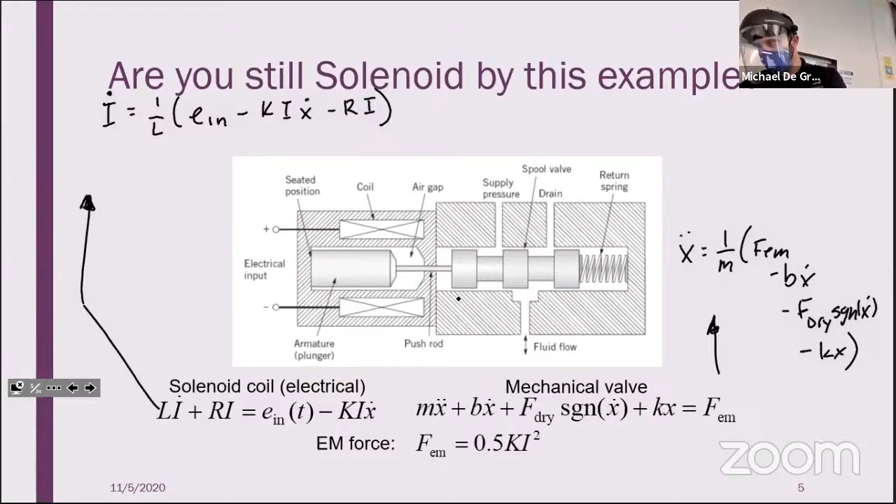SGN, that's the signum function, right? It's going to return -1 when we have a negative number there, +1 when we have a positive, and 0 when we have 0.

Okay. Let's look here. I've got my integrator block for my mechanical system, right? This is the same model that we came up with towards the end of class on Tuesday. Symbolically, then that's just plugging in a number once we get it. So we've got this, right? This is inside of my subsystem block.

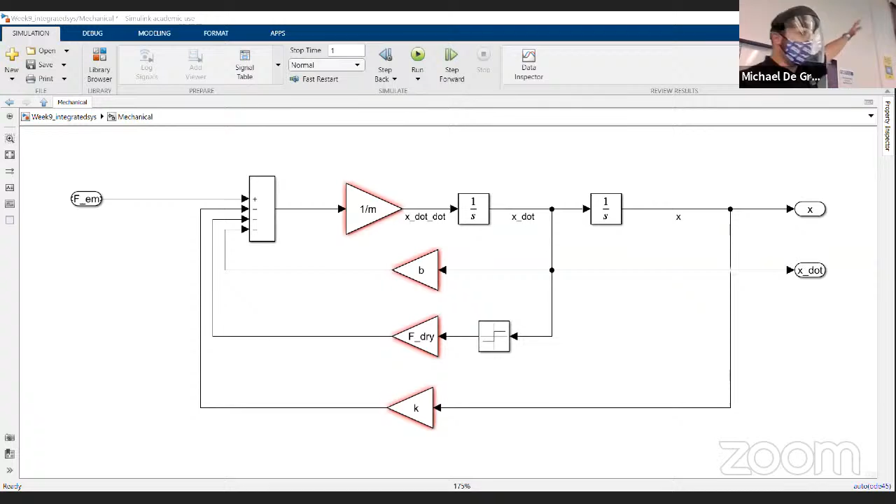So I've got this little bubble that says FEM. That's obviously my electromagnetic force, right? And what am I feeding out of here? Well, I've got the X position in that top little bubble there, and X dot in the bottom one. What are those? Those are my input and my output ports. So let's talk about subsystem.

Right. So you can type subsystem. You pick the top block here, and look, it gives me this. Notice it looks exactly like the other ones that I have there saying mechanical and electrical. And inside, they're kind of transparent a little bit. You can kind of see in there, and you can see it comes with one input and one output. Notice that the block itself also has one input and one output.

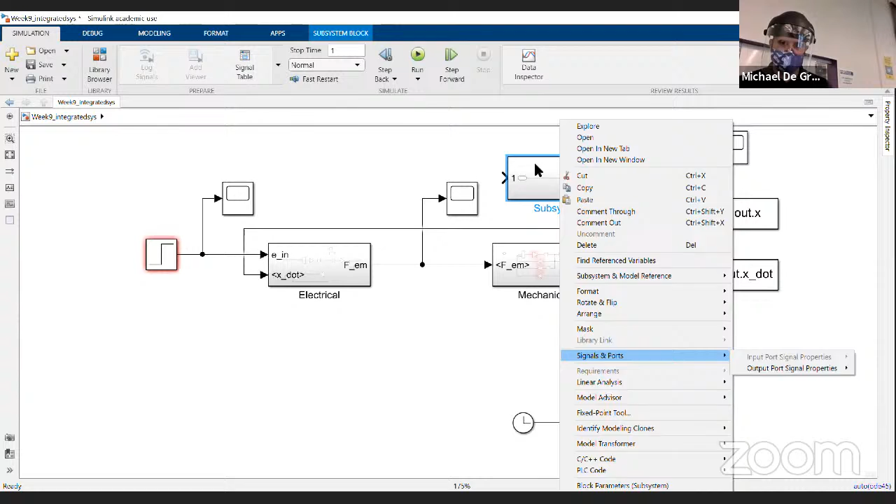So what if you wanted more? Well, there's a couple ways you can do it. You can go to signals and ports, add output signals. Or if you double click inside to open it up, you've got one and one. So you can disconnect this, and you can move them around. But if I wanted an extra one, I could copy it, Control C, Control V, and I can have as many as I like.

But when I come back out, which you can use this toolbar and click, notice now I've got 4 inputs. It automatically tracks them. And if you label your signals, it will automatically pull in a label for what the signal is. So let's go back in here. We'll get rid of everything that's in there. And if I do that, look, the block is blank.

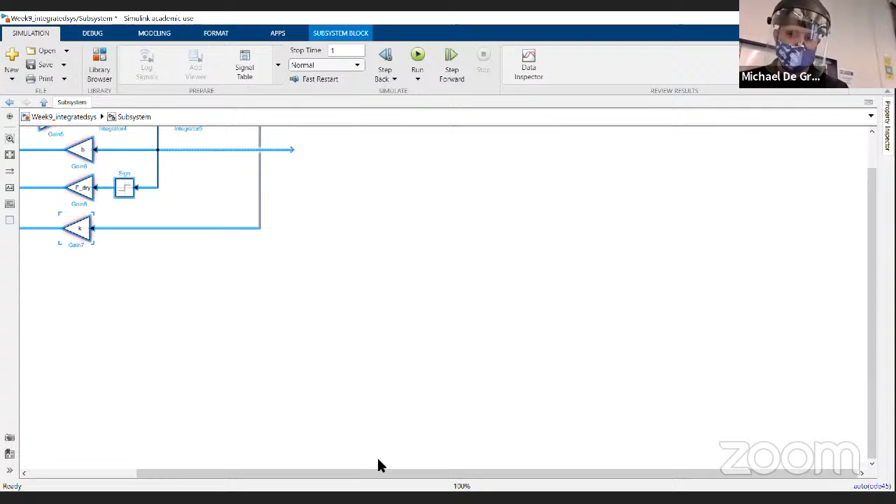And if you were to take all of your stuff from the initial diagram here, double click to get inside, then notice, this is the block diagram that we had from class on Tuesday, and I just copied it, pasted it, put it into the subsystem block. Now it's a subsystem, right? But now I don't have inputs and outputs. Oh man.

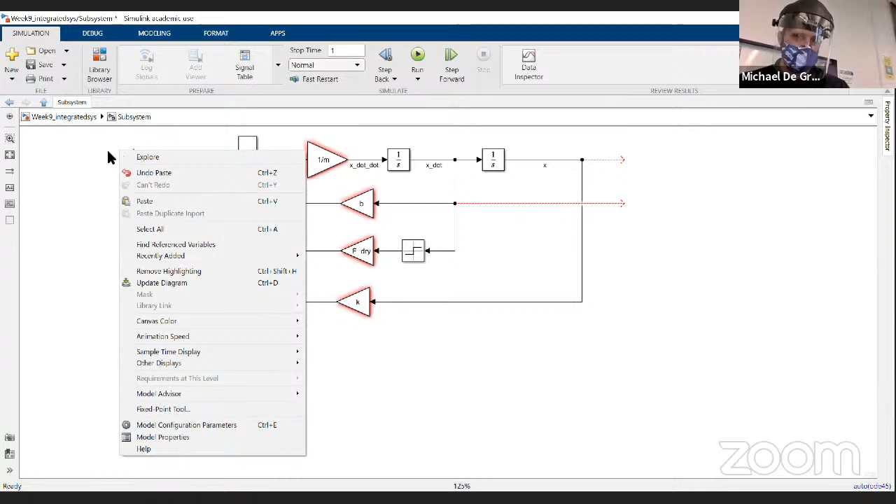So let's go up here. We'll go to our library. You can't see the library. I click the library button. You go to ports and subsystems, and then you can have an in or an out. So if I drag my in over here, I can drop it right there. Look, there's an in. Number of ports, port number. You can assign that. We're just gonna leave it as 1.

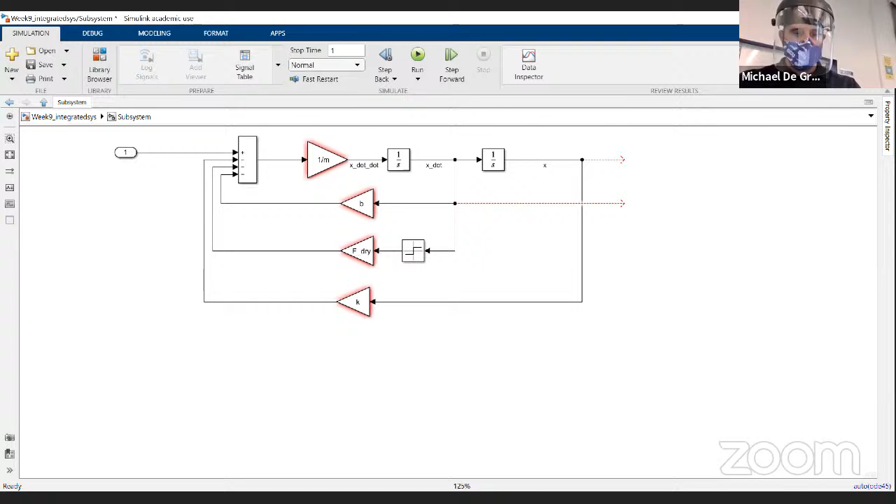What if I typed out? So instead of going back in the library, I'll just type out. Yep, we'll take out 1, put it there. I don't feel like typing it again. Copy, paste it, put it here. Come back out, I've got this stuff. How do I know that I want that to output position and velocity? Here's how I know this.

We look at the equations. X dot needs to come back and feed into the back EMF. X dot is creating the back EMF. Our equations are coupled, so our subsystems are coupled in some way. The electrical system produces FEM, the mechanical system produces what is used to produce the back EMF, that X dot, and we go round and round in a loop. And you can see it here: X dot is coming up, and back around is an input to my electrical system.

Okay. All right. What about this electrical system? So let's talk about the ground effects that I'm getting here, right? Why am I getting red fluorescence around these blocks? Well, I haven't defined any parameters yet. Notice, I've left it as a variable, right? It says 1/L on here.

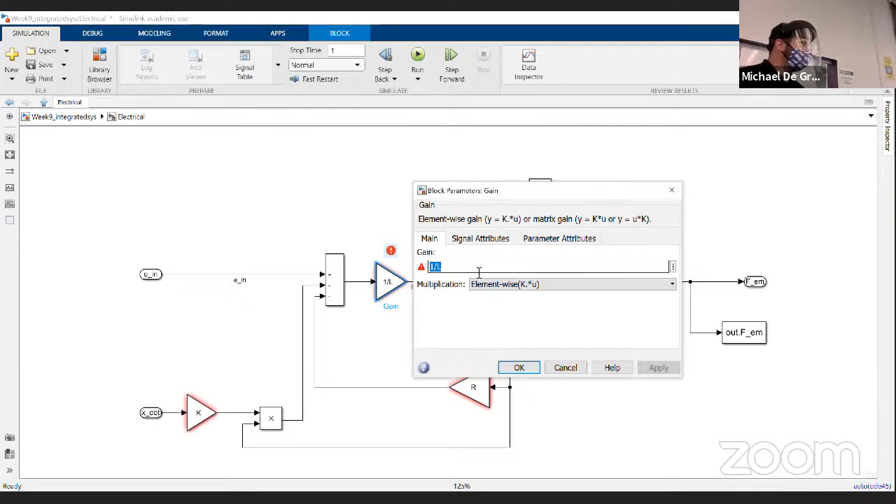I haven't defined what L is, and I think I went over this a little bit, right? But you can use MATLAB to define your workspace variables, and then those variables will get transferred, or will get pulled by Simulink, right? Because Simulink runs MATLAB in the backend, and they share the same workspace. So I'm going to define all of these in MATLAB in a second before we run this.

All right, so we have our equation, right? Our equation was I dot is equal to E in of T minus Ki x dot minus Ri, all times 1 over L, right? So what do I have here? Well, here's I dot, right? I dot, well, that's equal to E in minus I times K x dot. This is a new block that we haven't talked about though, right?

This guy. This is the product block. Why can't we just use a gain block, right? We're multiplying these two things together. Well, we're not multiplying it by a constant, right? You're multiplying two different signals together. And what the product block does is it takes two different vectors and it multiplies them element-wise.

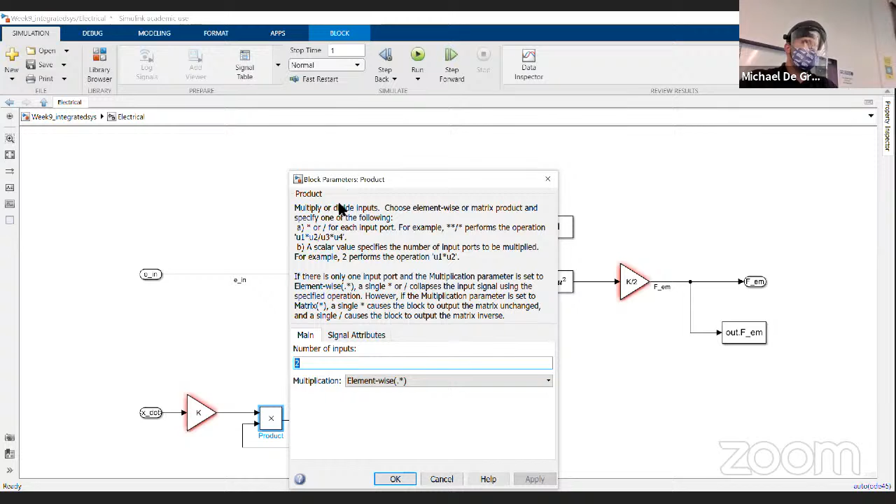And what that means is that it'll take the first entry of each one and multiply them together, the second and multiply them, and so on all the way down the line, right? Until we stop running our simulation. So it's going to essentially run this multiplication at every time step, right? For these two signals. This creates my back EMF, and then this signal is just R times I, and those all get subtracted. The whole thing gets multiplied by 1 over L. That gives us I dot, right?

I take the integral, this becomes I, right? But that doesn't give me FEM, right? Because FEM is K times 0.5 times I squared. Well, here's another new block. Here's the square block. What does it do? It squares my signal. So that's I squared, right? Here's I squared, and look, the square block does more than square, right? It does a lot of different things. You do log, exponential.

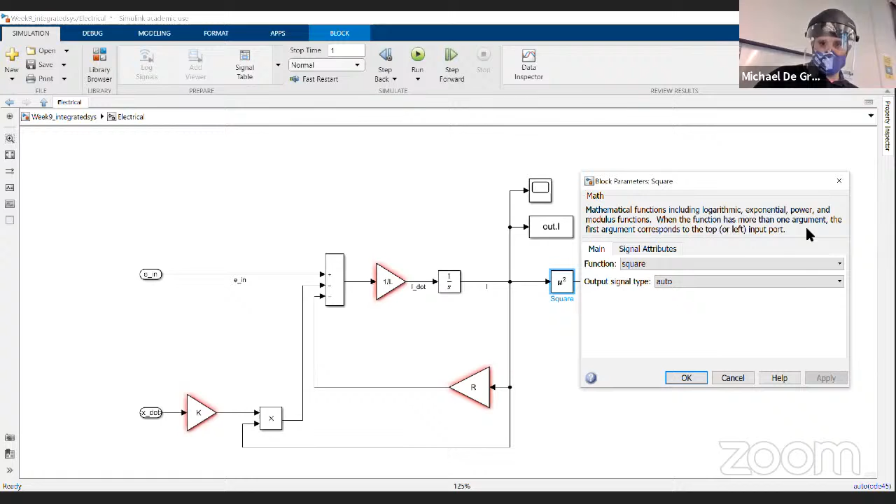This gets multiplied by my gain of 1/2 times K. And then that gets exported as FEM, right? Remember, that's my output node, right? So that's the signal that's coming out of this block. That gets pushed into my mechanical system, and so on and so forth, round and round and round, right? This is just feeding back.

Okay. Do you absolutely need subsystems? No, right? You don't. But like I said before, this looks a lot cleaner than if you did this without subsystems. Okay. All right. Do you guys have any questions on the makeup of this?

So the question is, how did I get my variables inside of, like, how did I get this to say, I got to use the right mouse, hold on. Oh, also should use the correct screen. That's also super helpful. Let's see. All right, here.

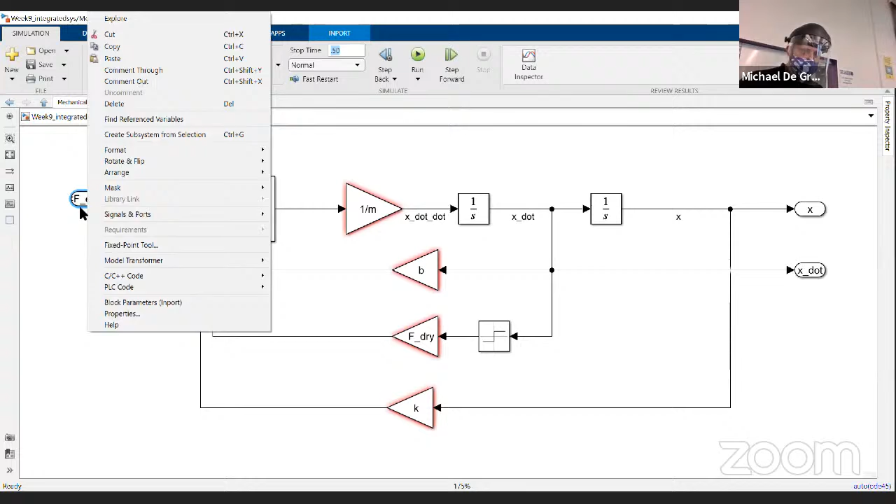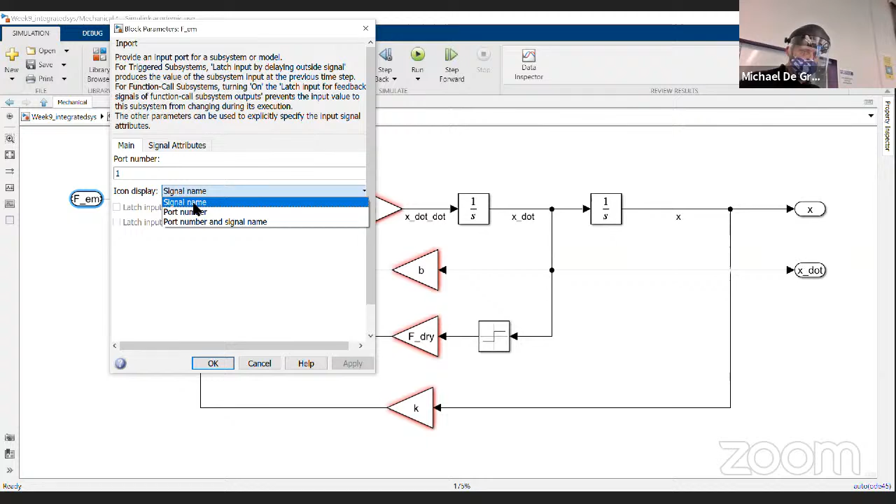How did I get this to have FEM in there, right? So, first of all, this is port number 1. If you double click it, you can tell it to display the signal name or the port number. So I just clicked signal name. How does it know what the signal name is? Because I named it right here. So whenever you name a wire, you're naming the signal in that wire, right?

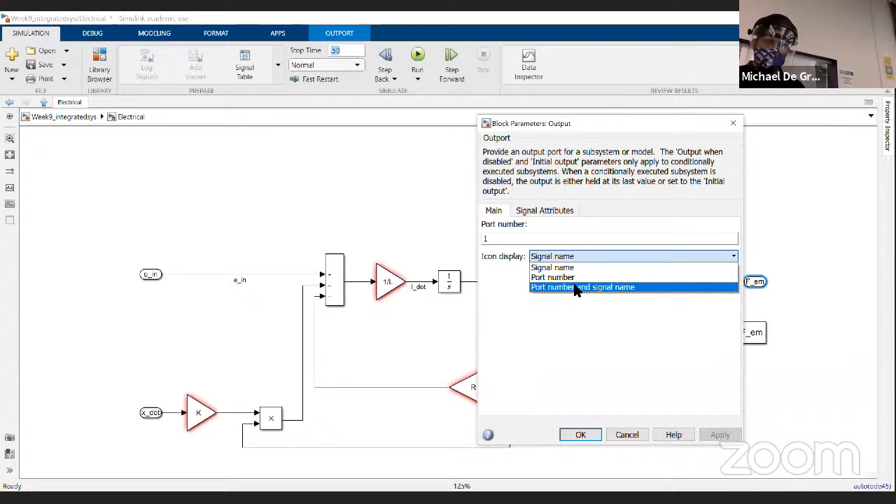So I know FEM is coming out right here, and because I put it into this block, instead of having it as, I think it defaults to port number, and you could also do port number and name, right? That's a little congested though, right? It defaults, I'm pretty sure, to port number, so it just tells you this is 1. Yeah.

So if you need this block, if you don't have one in here and you need an out, you just type out, right? And then out 1 comes up. Same deal, you can come up with in, right? The command is in and out. All right, we get those labels by actually labeling our signal. Otherwise, it'll remain as it defaults to the port number.

Right? Port numbers are also nice sometimes because if you're actually using this to connect to a real world device where that connects to a DAC port, you can keep track of what connection is supposed to be where, right? This is supposed to exit to port analog out 1 or whatever, right? So keep that in mind as well. Any other questions?

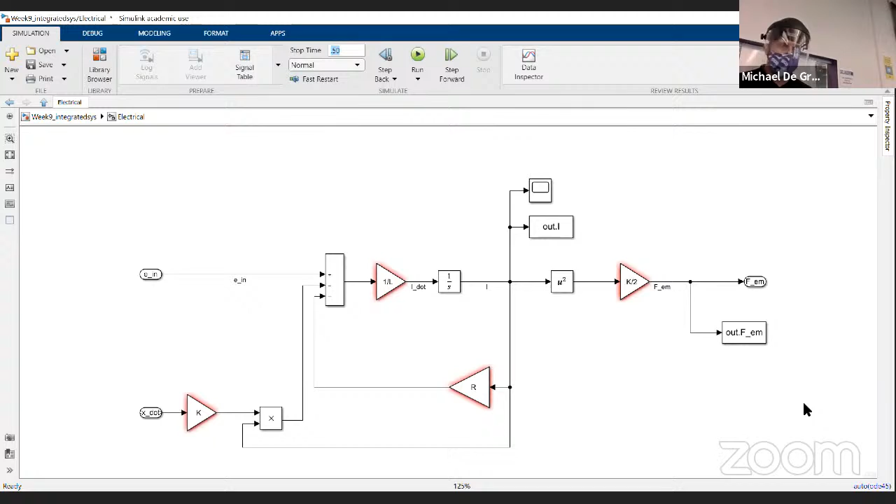Okay. Well, if we don't have any other questions, I'm going to go ahead and pop these values directly in MATLAB. Right? So I've done it before. These are the values that I gave you on those slides, right? If I hit enter, hey, this time it actually worked. Last class, it didn't even show my workspace right here. You can see my workspace is populated now, right? Great success. My workspace has populated.

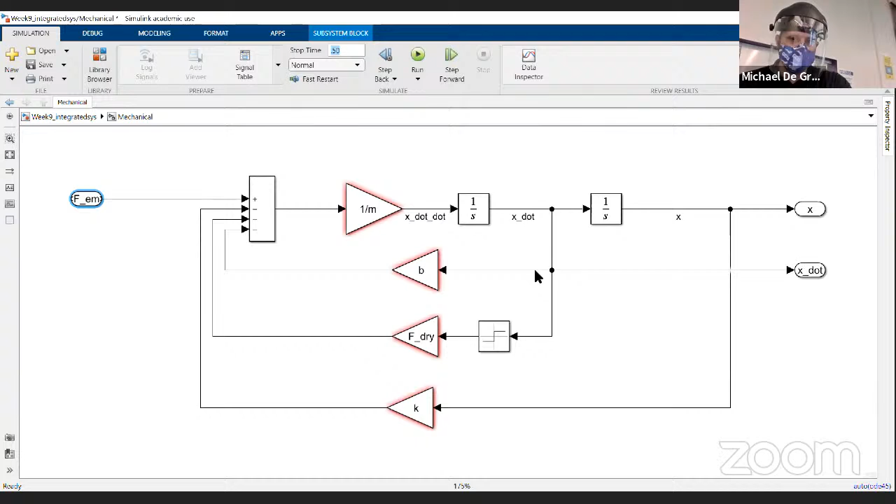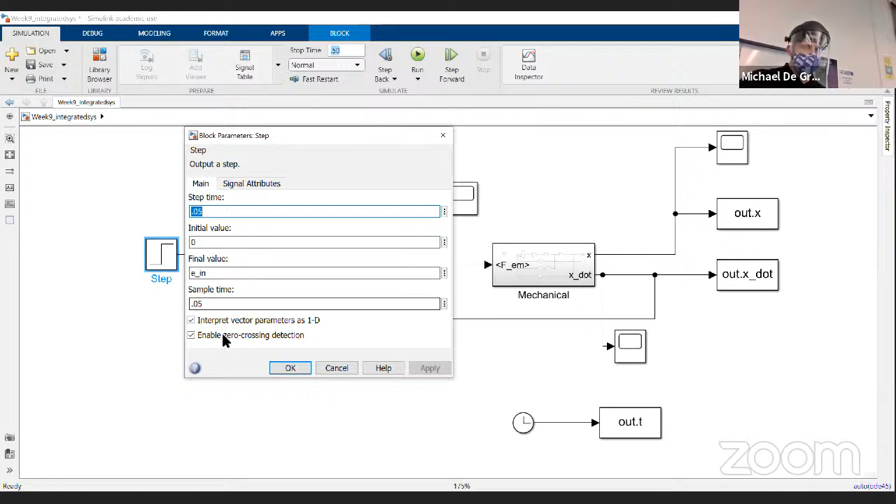I can go back to my Simulink model. And when I do that, everything should turn not red. So what was in here? Right, this is a step of 0.05 that goes up to e_in. Right? We can run this. I'll hit run. And there's a couple of cool things that we can do here. Well, first of all, let's look at this scope.

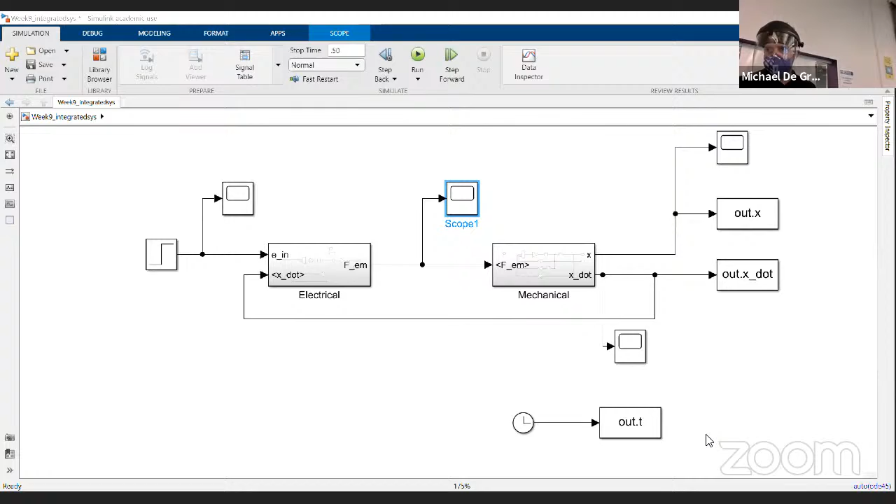There's also another thing we can look at. Nope. Or maybe we won't. Who knows? We can also look right here. This one is particularly strange. This is my electromagnetic force. The output from my electrical block. This is weird looking, right? What was that, Charlie?

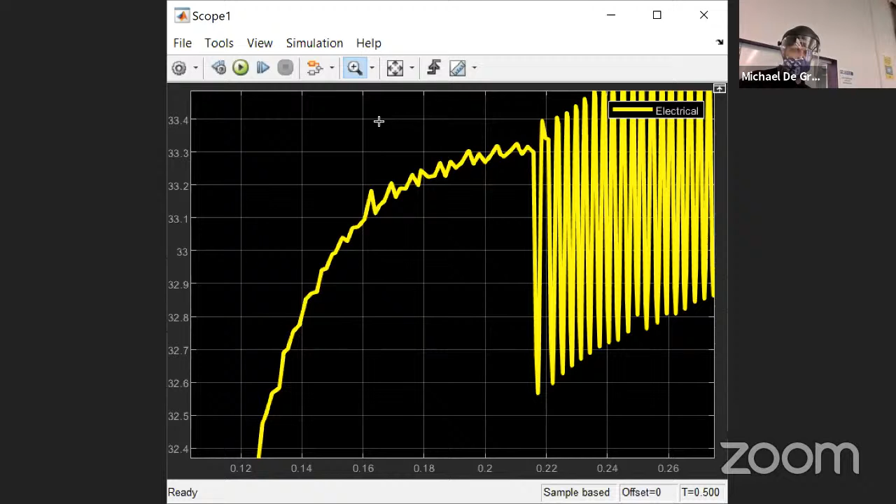So again, remember, this is nonlinear, right? This is a nonlinear model. So we get this weird, it turns on and then it spikes down, and then it comes back up, right? And then it oscillates, right, at steady state. All right, we start to see some weird oscillatory mechanics start to take over around here. Right? But let's talk about this, right?

So the force comes up, then it drops a little bit. Why? Well, that's probably where we broke friction. Because remember what the friction curve looks like, right? You increase till you hit the max, and then you're going to drop, and your friction's going to plateau, right? So we hit some maximum frictional force, it instantaneously flips to kinetic friction, which is a lower amount of friction. So we have that traction there, and then we come up.

All right, and then, because it's third order, remember third order systems are just a combination of first and second order systems, typically. And so the oscillation comes from our second order dynamics, which take over at a much later time.

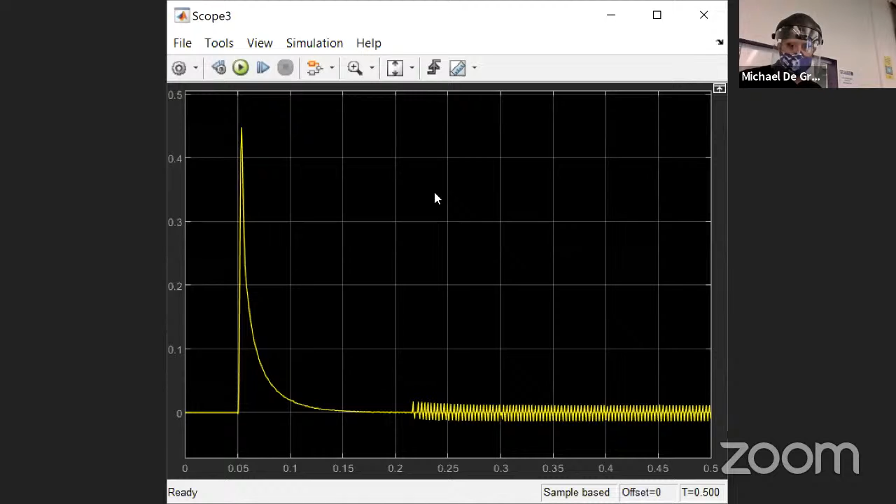The other thing that we can do is we can look at that x dot graph, right? And here's my x dot graph. That's the graph of my velocity. And so we get a large input, and then it dies off until we have steady state, right? So we have a large amount of velocity to start with, comparable to the rest of it, right? And then it comes down and settles, it oscillates around 0.

So right, we spike up, we move out of the way, and then it slowly approaches its steady state position, right, by slowing down. Then it hits steady state, and it's just going to kind of shake there, right? It's just going to kind of shake there. Ooh.

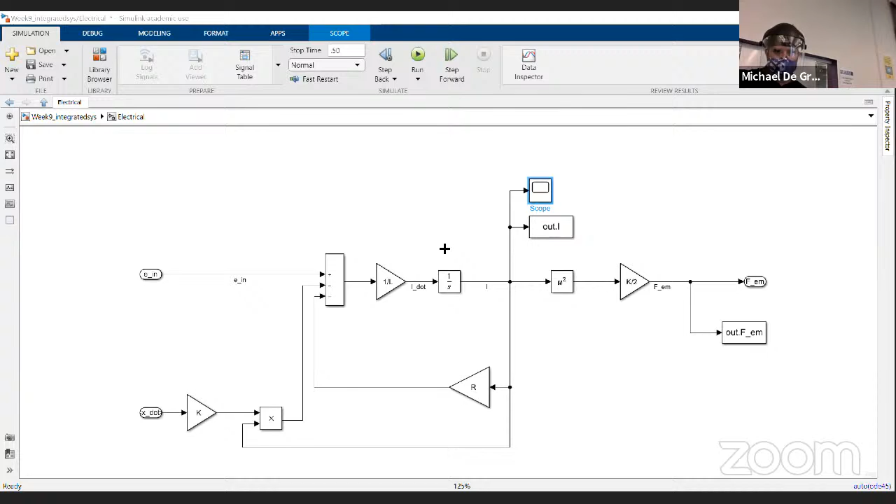You can come in here and pull signals off if you want to, right? That works and it's fine. What would you expect I to look like if you looked at the current? Now, I want to know what the current response is, right? Well, it looks a lot like the force, right? Which kind of makes sense because we just scaled the current to get the force, right? Scaled the current to get the force. That's it. Okay.

You guys have any other questions on this? Or anything? No? Sure.

Yeah, so in the homework, right? I forget what number it is. I think it's 13. Homework 13, you have to do the motor model, right? You could do something like this if you didn't want to create the transfer function from one end to the other, right? I mean, you still have to, because part of the problem asks you specifically for the transfer function, right? But if you didn't want to model just the transfer function, you could certainly make subsystems of each and have them interplay with each other.

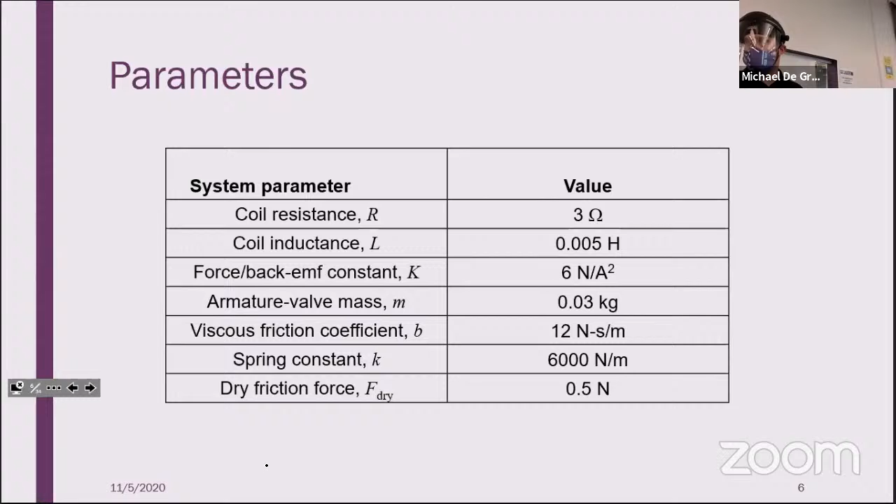Well, guess what? There's another thing we can do. I can use an M file to run a pre-existing Simulink model with parameters that I set up. So hey, check this out, right? And this, I believe this code is in your textbook. I believe so, right? And so we're going to set our parameters, right? We've got our solenoid electrical model right here. We've got the mechanical portion right here. And then we've got this guy, right, in this blue box right here, right?

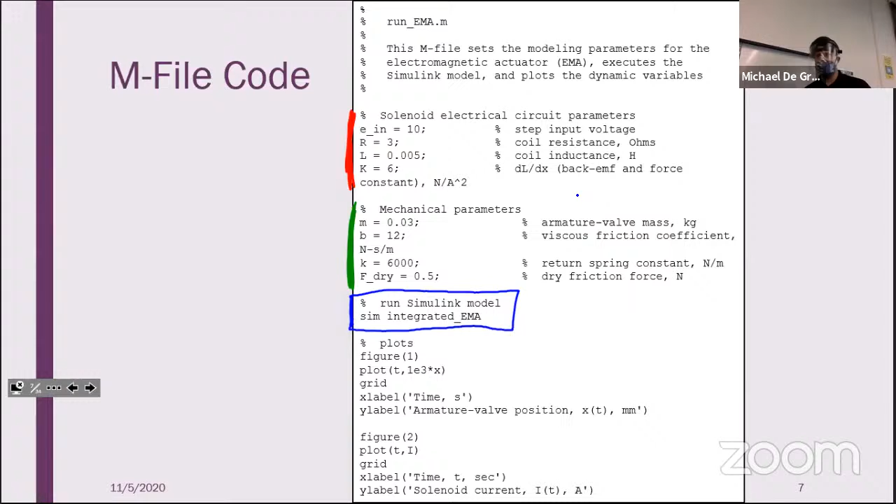Run Simulink model. And if you use the command sim and then give it the name of your Simulink model, you don't even have to open Simulink. It will just run it. Literally minutes of your time saved from having to open Simulink. Minutes. Right? But this is nice, right? Why is this nice? Because we can plot directly in our code, right? So we don't have to waste time digging through very complex Simulink models to adjust all of our variables. We just do it here.

We can print our plots to screen, right? Once you get your plots printed to screen, you could even save them from this code, right? You could use the save as command and save your plots as .figs, right? So you could have them for later. And then you could adjust your parameters and do it again, right? So you can see how changing specific parameters would affect the entirety of your system, right? So this is nice, right? And we'll talk a little bit about this again in a little while.

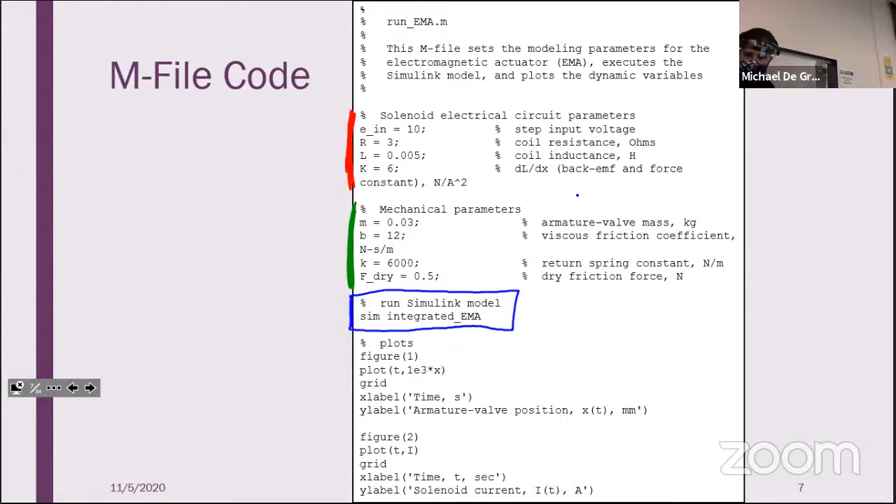Okay, what time is it? All right, so. When we come to the Tri-Wizard points for the week, you can earn up to 20. You can earn up to 20. Yes. So. Is it? I don't know. It could be. It could be very close to our lab.

So what do we have here? All right, I gave the other class 30 minutes, so it's only fair that you guys get 30 minutes, because this is a tightly regulated competition. The Tri-Wizard committee would string me out to dry. So you get 30 minutes to do this problem. There's a couple of things that I didn't tell you. I will throw them into Discord so you guys can get all the parameters, okay?

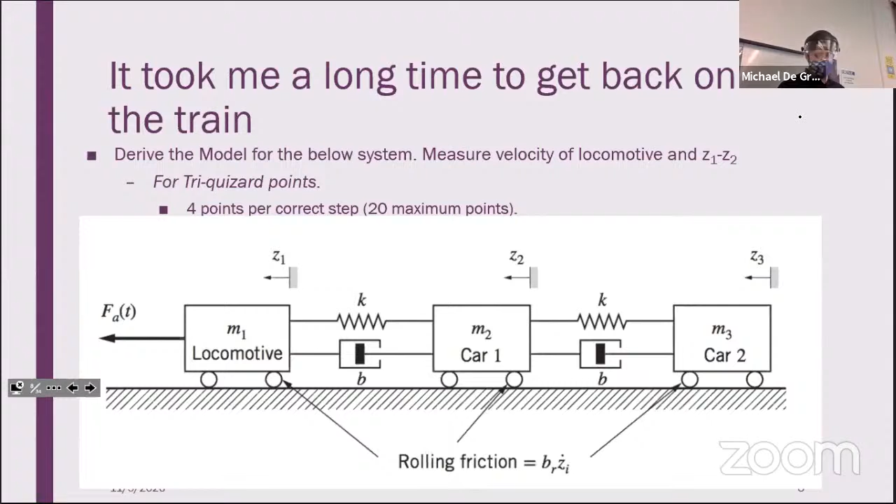All right, here, this is the part that everybody did well, right? Y'all got good free body diagrams. Nobody fell into the trap of not having forces on both M1 and M2, right? Y'all have equal and opposite forces. Noah, your question from before, are these in extension or compression? The answer is yes, because it doesn't matter as long as you're consistent with writing your equations, because the signs will all work themselves out.

Okay. So I've got my truths, right? You need to have some semblance of this, right? My input is FA of T. You can also include Z1, Z2 and Z3, right, if you wanted. But I decided to go global for this one, because it doesn't really matter. We're going to state space, so those intermediate inputs and outputs don't really affect us too much.

All right, and then my truths, right, some of the forces, FK1, right, these are all, as Connor pointed out, free-ended. Well, that's not entirely true. They're not all free-ended. The rolling friction is fixed end, but everything else is free-ended.

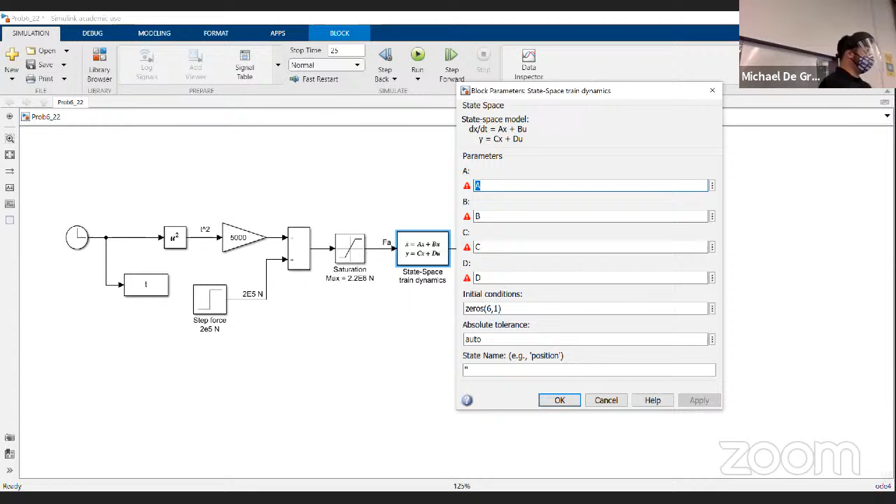So let's take a look at the Simulink, because that's what everybody really wants to see, I know. Simulink. That looks gross. This looks super gross. Check it out, Trevor. Look, I have these defined as A, B, C, and D. I'm actually going to enter these in MATLAB. Why? Because it's way easier to do it that way. Because you're right, entering this as one line is going to be a pain in the butt. So I've got these things set up. So what is going on here?

Remember, my input was what? My input was 2 times 10 to the 5th. This is the 2 times 10 to the 5th. This step is just turning on at 0, right? So it's 2 times 10 to the 5th plus 5,000 t squared. Well, that's this. I'm taking this clock, running it through a square block to get t squared, multiplying it by a gain of 5,000, and I'm adding those two things together. And then it goes into a block that we haven't used before. It goes into a saturation block.

And what's the saturation block going to do? It's going to saturate my signal. What does that mean? It means that it's going to cap it. This saturation sets a maximum, and it says my upper limit is 2.2 times 10 to the 6th, and I will never go above that. So any force higher than that, it will just cap. It's an electronics term. We saw it when we talked about op amps in the op amp video. If you give an op amp too much, it's just going to tell you that you hit 12 volts, or whatever the max voltage is, because it cannot read above that. Same deal here. Once our force reaches this level, it will always stay at this level.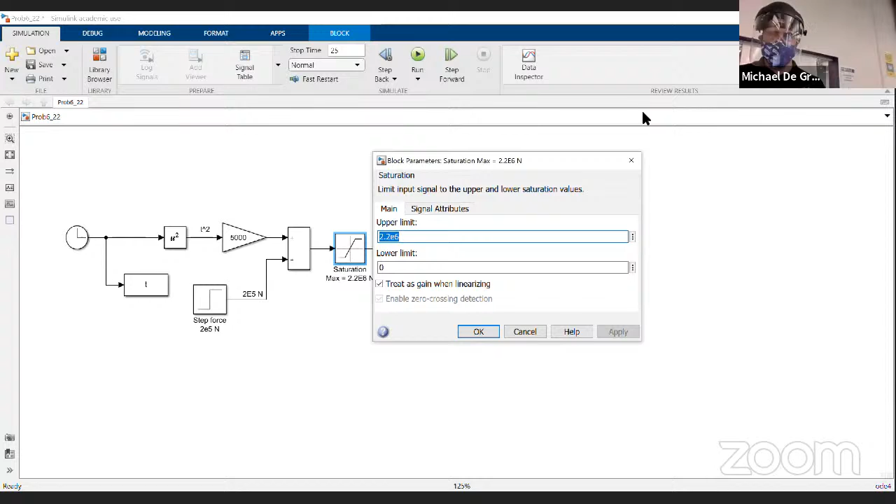Okay? Now, if you do the math, and you plug 20 seconds in there, guess how much force you get at 20 seconds? 2.2 times 10 to the 6th. So after 20 seconds, it stays at that level. All right, so that goes into my state space block. Magic happens, right? You know, animal sacrifices, all those things. And then we use this other block that we haven't talked about. This black line. That is the demux block.

So what is the demux block going to do? It's going to demux my signal. That's not helpful, right? That's not a helpful thing to say, Dr. D. Why would you say that? Because now you know how I feel when I ask for definitions and you just tell me the words back in a different order, okay?

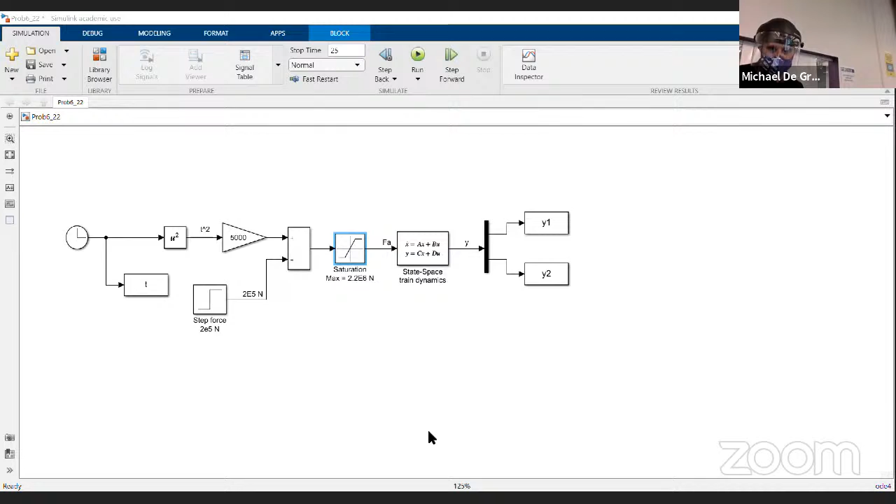But what does it do? It takes this signal Y, and Y is an array. Y has two components, Y1 and Y2. And it splits that vector into two different signals. And then we read it out to our workspace as Y1 and Y2. We could also read it to a scope, but we're not going to do that, because instead we're going to do this. I have a code to run. All right, check it out.

I've got M1, M2, M3, K, B, and BR. These are based on the JDSMC 1974 paper by Genin et al. I was wrong, it wasn't ASME. I apologize. I'm probably going to get sued now. All my videos will be taken off of YouTube.

And there's that. Right here, we can do our state space representation. Z1 is my locomotive position. Z2 is my car 1 position. So slightly different Z variables. X is Z1, Z dot. So I'm telling you what my state variables are and what my actual variables are.

And this is how we set up our A matrix. I did it by rows: A row 1, A row 2, 3, 4, 5, and 6. And then I created one matrix that concatenates all of those together. B, C, and D were fairly small, so they didn't need that treatment. Another way you could do this, if you really wanted to, you can say... should work.

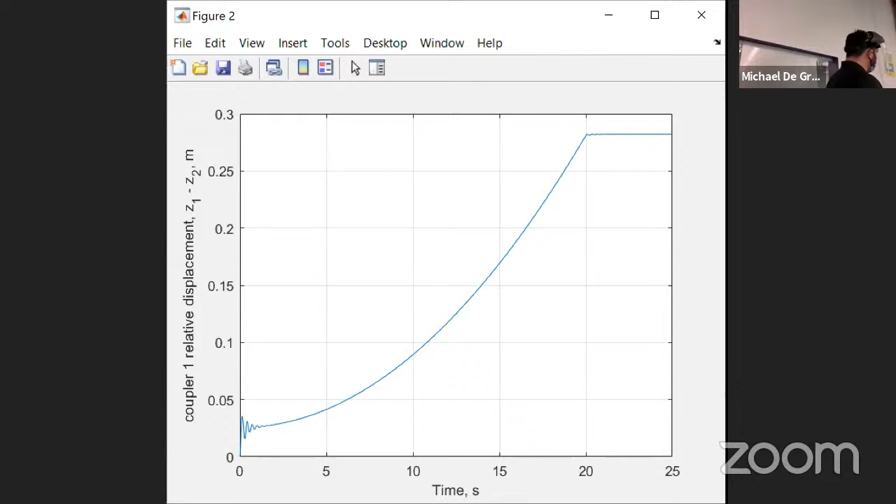So we lag behind our force input a little bit, but we would expect that, right? What about that displacement, the relative displacement of the two cars? This one's pretty interesting because we've got some oscillatory effects at the beginning, right? So when it starts to move, the back cart's going to try to catch up a little bit until it actually overcomes the spring force and the friction enough to get some separation. Then it's going to ramp up pretty heavily, and then after about 20 seconds stay constant. Okay.

I'm sorry, say that one more time, Joe. So in terms of the lab, essentially, yeah, you're going to model this. You're not going to use that input that I use, right, because it's not a train. But you're going to model your system, right? You're going to then compare that to, like, what is the position of the third cart?

Oh, yeah, you know how much amperage is given. I'm going to give you the torque, the IT curve, right? The power curve for the motor that gives you all that stuff. So you can figure it out. You can figure out the initial torque. Right? All right. You guys have any other questions?